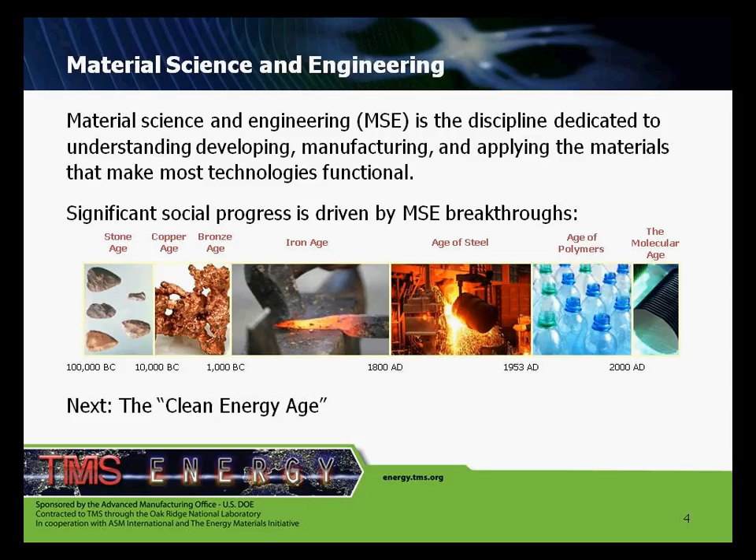If we look at the population growth and the rate at which it's growing at 1.4% average per year, and the increase in energy demands at 1.7% per year, it is very clear that the clean energy age is here, and we need to position ourselves as a competitive nation, to ensure that we can produce and manufacture and make available the materials for an age where renewable energy has to be a main player. As I said, it's really critical to our national priority.

There have been a lot of reports coming out in the recent past that are also pointing out the critical role of materials. But more than just materials development, it's the manufacturing and making of all of these various materials for the clean energy economy. TMS, the Minerals, Metals, and Materials Society, has led a 2-year study. This was not a committee of 6 or 7 people coming together, but a long-term effort with many people involved.

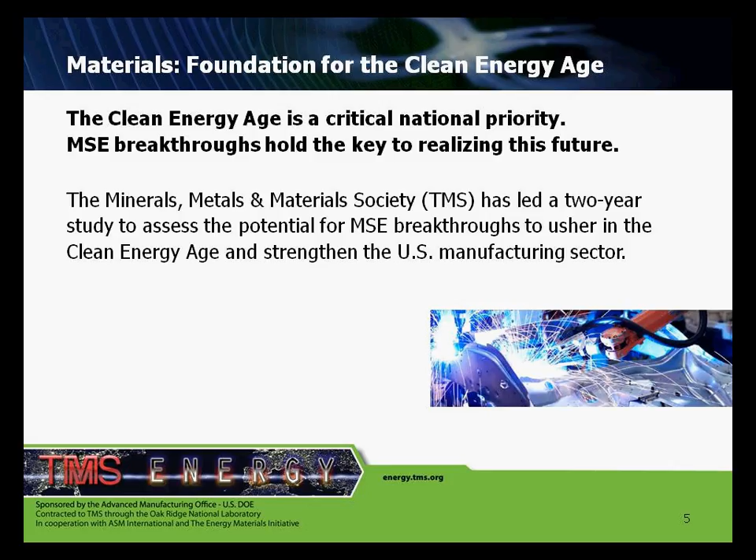To do what? To assess the potential of MSE breakthroughs. What are the main areas in which we can really make an impact in the short term as well as the longer term? Short term meaning the next 10 to 15 years, and longer term meaning 20 to 30 years or so. So TMS has really taken the lead to organize and facilitate and, as I said, led this study. And as I've already pointed out, it was not a small committee, but rather many people were involved.

Warren Hunt later on will talk about the process and the various phases, but in a nutshell, we had a blue ribbon panel that looked at setting the vision, the framework for what are the areas in which we must be focusing in this study to make an impact, to meet the objectives of the study.

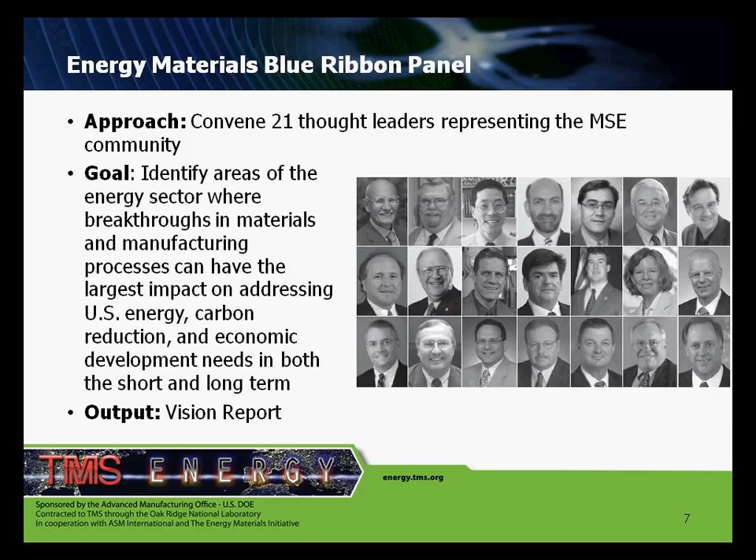The output of this is a vision report that if you have not read it, you really should. It's only about 20 pages or so long, very well written, very well done. A lot of work has gone into it and it really set the stage for all the various phases that followed suit. At this point, I'm going to give the floor over to Warren, who's going to talk more about the various phases and what came out of these studies. Warren?

Thank you, Diran. I'd like to first provide you with a little bit of an overview of the project, and then I'll discuss some of the specific findings in a bit more detail. The result of the work that Diran described was a series of reports that were published over the 2-year period of the study. The first of those that Diran referred to earlier was the vision report of the Energy Materials Blue Ribbon Panel. And this was work that identified the high-level areas of the U.S. energy sector where material science and engineering research in particular could make potentially significant contributions to our energy and carbon reduction needs.

At the conclusion of the vision report and the Blue Ribbon Panel activity, we convened a number of groups to work on the second phase of the project, in which opportunity areas in material science and engineering that would create significant economic impact, energy savings, and carbon emission reductions were identified. The results of that phase of the project were published in a report called the Opportunity Analysis for Material Science and Engineering. This report was published at the beginning of 2011.

In particular, today what we're going to be talking about is the third phase of the study. This third phase is captured in the Innovation Impact Report, which was just released at the end of 2011, results from the work of a number of experts, 50 or so in number, representing industry, academia, government laboratories, government agencies. They were organized into 5 innovation impact teams, and the purpose of that group's work was to really look at specific opportunities where manufacturing and materials innovation could deliver the opportunities in the relatively nearer term, in the 2 to 10-year period.

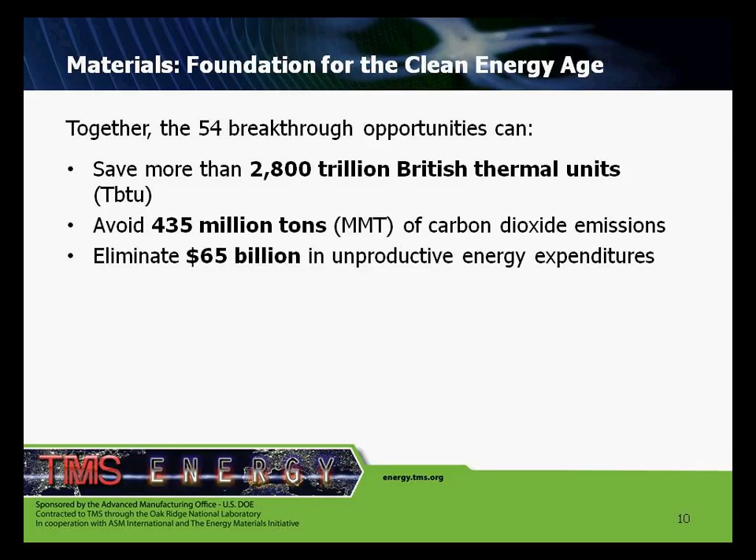Now, I've just provided the very highest level information from the report. In the report itself, there are some more specific breakdowns of energy savings, carbon reduction, and economic development opportunity by various areas of energy generation, energy storage, and energy use. So I would refer you to the report for that further information.

Now I'd like to talk through a few of the areas where breakthrough opportunities were identified in the project. And I would like to offer them to you in 4 major categories. I'll actually talk about the first 3, and then I'll hand off to Dr. George Spanos to talk about the 4th. And these 4 major areas are listed here. First of all, materials and manufacturing advancements can make manufacturing more energy efficient, more productive, and more profitable by reducing the losses that occur in terms of time, materials, and energy in those processes. So we'll talk a little bit about that.

Next, we want to talk a bit about reinventing energy-efficient transportation. And in this area, we talk not only about automotive transportation, but also the many other forms of transportation. And we'll be looking here not only to look at how we might reduce energy and environmental impact, but also jumpstart the development and growth of new supporting industries. The third area that I'll talk about is making the most of our energy resources, both through more efficient energy generation and by maximizing the value of our emerging energy resources. And then last will be discussed the acceleration of innovation, and in particular here the employing of cutting-edge computational tools and techniques that save time and money in bringing the next generation of energy materials and processing discoveries to market.

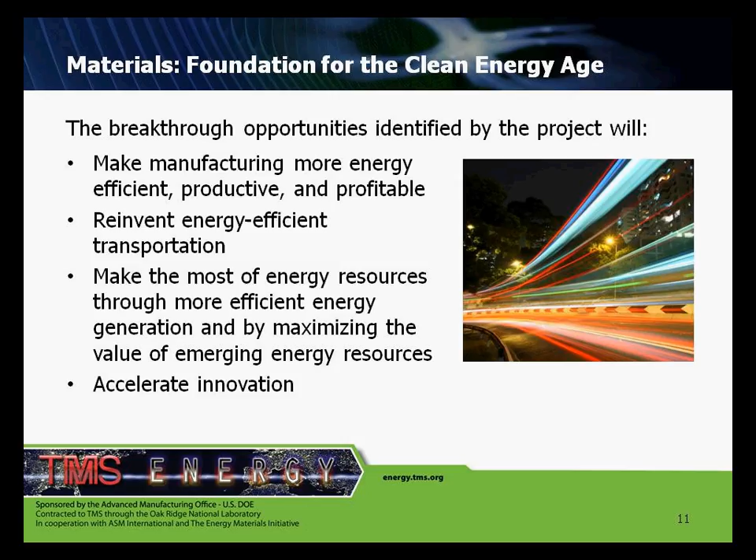So let me now say a few words about each of the first 3 areas. First, let me talk a little bit about making manufacturing more efficient, profitable, and productive. This is an area of great opportunity for the material science and engineering community. And in particular, materials and manufacturing advances allow us to minimize wasted material through things such as net-shape processing, combining and streamlining processing steps. And an example we'll talk about here in just a minute is perhaps an area like additive manufacturing. And then also, recycling and recovery of both materials and energy can help make manufacturing processes more efficient, productive, and profitable. So these are some of the broad areas. Again, the report in its various opportunities discusses some specific areas in more detail.

But let me just mention one particular example of how materials processing can be used to make manufacturing more efficient. And this is an example that is cited in the Materials Foundation for the Clean Energy Age booklet, and it is provided to us by Caterpillar. It's the Caterpillar remanufacturing process. Through a surface modification process that Caterpillar uses to apply wear and corrosion resistance coatings by processes such as metal spray and laser cladding, they were able to remanufacture 100 engines per day using only 10% of the energy that it would take to manufacture new engines. So significant savings in energy, reduction in carbon dioxide, and improvement in manufacturing efficiency.

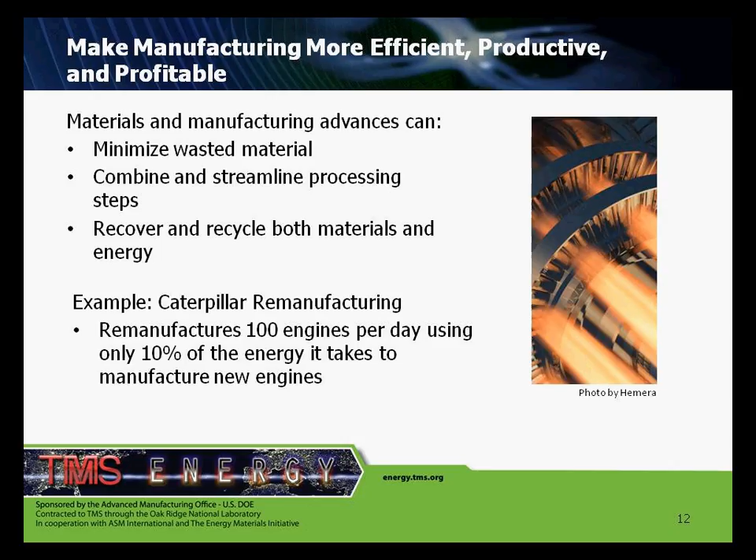Let me move on now to the next area that I'd like to focus on, and that's particularly looking at reinventing energy-efficient transportation. And this is an area that there's great opportunity, again, for material science and engineering to contribute. Materials and manufacturing advances can enable us to produce more cost-effective, lightweight, high-strength materials. Reducing the weight of our transportation vehicles is a significant way to reduce their energy consumption. Also, it can facilitate multi-material construction of these vehicles. Oftentimes, not just one material of construction is desired for the most efficient structure, but joining these materials together can oftentimes be a barrier.

So facilitating construction of vehicles made from many materials is important. And certainly improving battery performance and affordability in hybrid and electric vehicles is important as well. But again, in the way of illustrating something specific for you here, let me just highlight one particular case study that again is described in the Materials Foundation for the Clean Energy Age booklet.

And this is from the Ford Motor Company. They have actually been working on developing aluminum castings, aluminum engine castings that will significantly save weight. And they've been able to reduce the product and process development time very significantly and save a significant number of dollars in terms of R&D expense. So this is an area where now again the tools, computational tools and capabilities can really make a strong contribution. And we'll hear more about that in just a little bit.

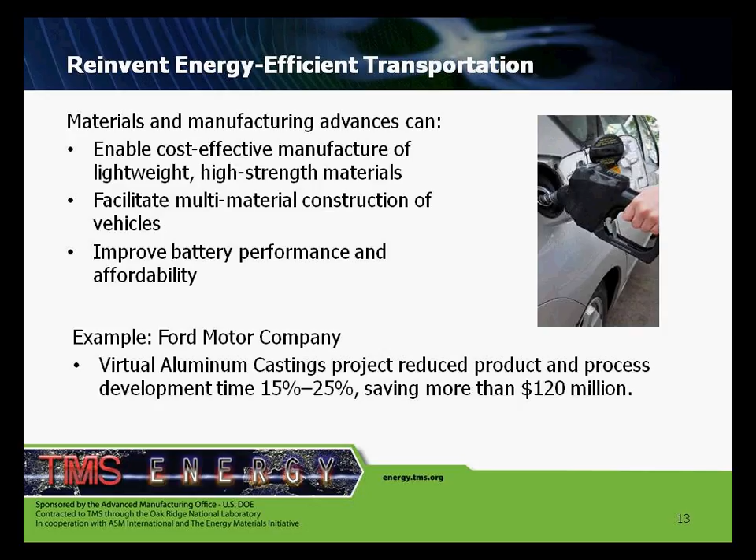The third area that I'd like to cover is making the most of our energy resources through more efficient energy generation and by maximizing the value of emerging energy resources within the spectrum of energy generation and storage technologies. A few of the kinds of opportunities that were identified in the report and are covered here are converting waste heat to electricity more efficiently, particularly through improved thermoelectric materials.

Second was improving the tolerance to extreme operating conditions of next generation energy systems, in particular operating those systems at higher temperatures. And that applies to both conventional power generation as well as the nuclear power generation area. And the third area that falls into this category is increasing the performance of renewable energy systems, such as battery systems. And that's an area where I'd just like to offer one additional example.

This is a company called A123. They're a battery manufacturer. Through material science improvements, particularly in the area of the lithium-ion cathode development, in which they have chemically doped this with a nanoscale phosphate to improve battery life, they were able to achieve a battery life improvement of nearly 10 times compared to conventional batteries. That's a significant benefit for the use of these batteries in a number of applications.

And again, from the economic development perspective, a point to make here is that this success has enabled the company A123 to grow from a 10-person startup team to over 2,400 employees in 10 years. So we can see that not only do these improvements impact our energy, carbon, and reduction areas, but also enhance economic development. So those are the three examples that I wanted to give you in this area.

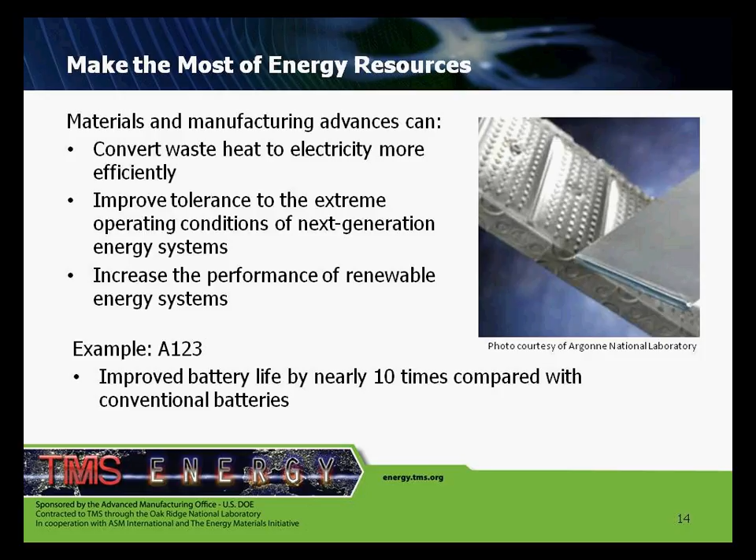Let me just make a comment on the next slide in terms of, well, where is this going forward? How can this all have a material impact? And I think the importance of material science and engineering and energy systems is being really broadly recognized now, much more so. Not only in the federal government, but also in university programs and in industry. But let me just highlight three areas where the federal government has been involved in really moving material science and engineering R&D forward.

First, the Department of Energy's Advanced Manufacturing Office, previously known as the Industrial Technologies Program, is focusing on two main areas of technology research and development, innovative manufacturing processes as well as innovative next-generation materials. So this is an area that they're directly supporting, and I think it clearly shows the role that MSE can play. Two relatively recent announcements: the Advanced Manufacturing Partnership.

This is the Obama administration's partnership, a national effort bringing together industry, universities, and the federal government to invest in emerging technologies that will create high-quality manufacturing jobs and enhance our global competitiveness. Advanced materials is a key part of this partnership, and in particular, I'd highlight the Materials Genome Initiative, which is being developed through the Advanced Manufacturing Partnership. It's slated as a $100 million multi-stakeholder initiative focusing on accelerating materials discovery and development. And clearly, energy materials have a key focus in this initiative.

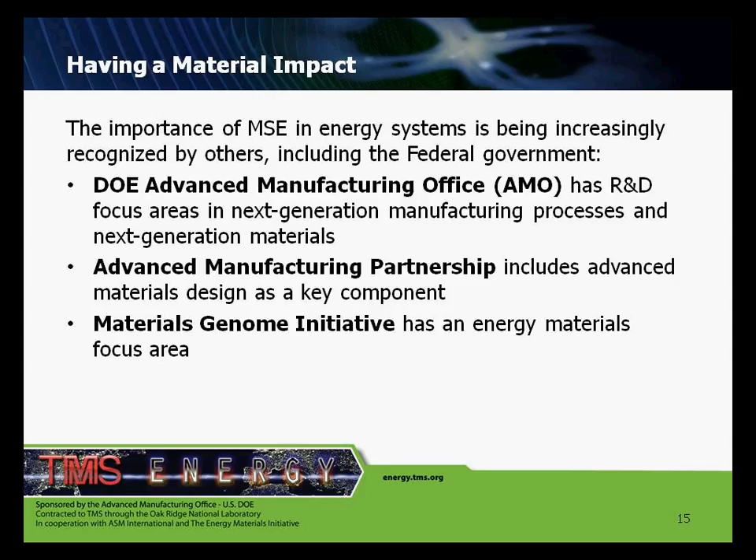The Innovation Impact Report will be a valued resource for informing these and other programs as we go forward, because it identifies some specific opportunities for MSE breakthroughs that are going to save energy, reduce emissions, and strengthen the economy. To realize these opportunities in the near term, however, accelerating the materials and manufacturing innovation process is critical. And so to address that, I'd like to hand it over to Dr. George Spanos, the Technical Director of TMS.

So the first question we can ask is, why is accelerating innovation so important? Well, material science and engineering development and deployment historically is often very slow and expensive, and that causes many applications to make do with the existing materials and technologies that are available. But using existing technologies prevents energy systems from achieving their optimal performance, and in particular, these long lag times inhibit the U.S. from being the first to capitalize on the innovation opportunities.

We have cutting-edge computational tools and techniques that can provide options for accelerating this innovation. In particular, these tools are critical to understanding the nature of materials and simulating their system performance, and also for predicting and preventing materials failures. I'd now like to cover two of the tools the material science and engineering community is using to successfully accelerate innovation.

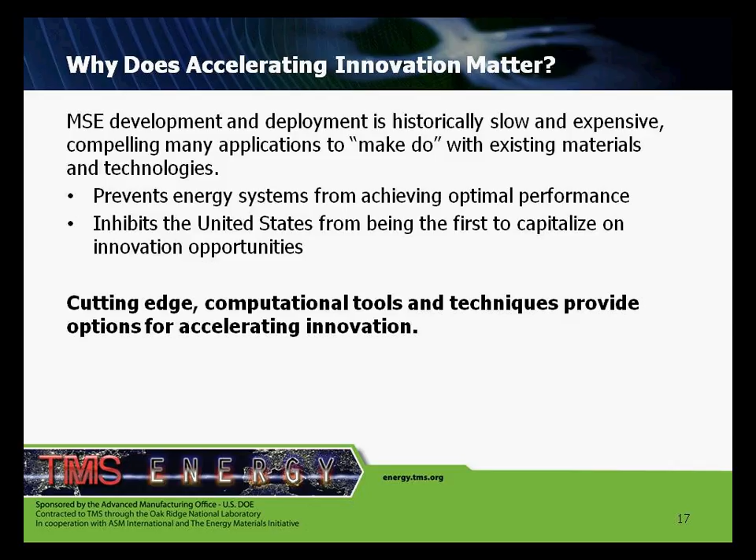The first thing I'd like to discuss is collaborative materials databases. What do they contain? They contain images, sometimes videos, and especially quantitative data that characterize the structure and the properties of materials. For example, the internal structure of a material, its strength, its corrosion resistance. These databases help scientists to make informed decisions when they're selecting materials for a given application. They also streamline the design, reducing trial and error and resulting in large cost and time savings and energy savings.

Just as importantly, they provide critical communication with the computational models for both the model input, oftentimes that's experimental input that drives the models forward and validates them, and output so that people can see the output and use the output of the predictive models.

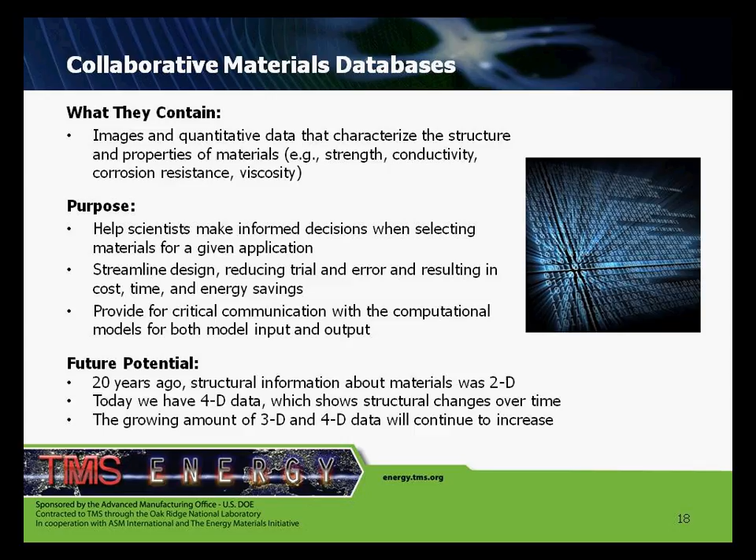There's a great future potential here for this technology. 20 years ago, for instance, structural information about materials was predominantly two-dimensional in nature. But today we have four-dimensional data. And what we mean by that is data that's spatially in 3 dimensions, but also changes over time, and time is that 4th dimension. The growing amount of the 3D and 4D data will continue to increase, enabling the acceleration of material science and engineering advances as we go forward.

Another enabling tool for accelerating materials and manufacturing innovations is something called integrated computational materials engineering. This integrates materials information that is captured in computational tools with engineering product performance analysis and manufacturing process simulations, as brought out by the 2008 National Academies study on ICME. So the purpose is to simulate the complete materials and component development process from the basic materials issues to simulating manufacturing processes. In this way, it's very useful to reduce the number of physical test models needed, and this can result in large cost, time, and energy savings.

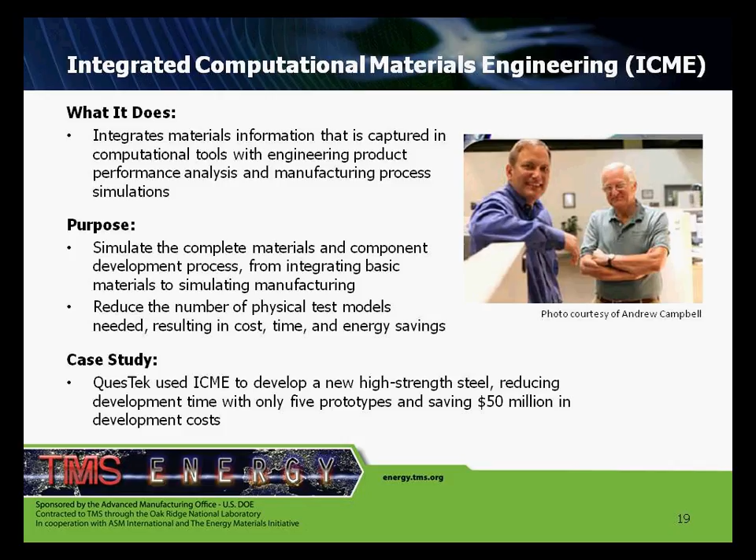In this regard, one case study that I'd like to mention is a study by QuesTek Incorporated, which is a materials development firm. They used integrated computational materials engineering to develop new high-strength steels, reducing the development time with only 5 prototypes being needed, saving an estimated $50 million in the development costs. This ultra-high strength steel offers superior corrosion resistance and is ideal for meeting the demanding performance requirements of landing gear in aircraft.

Implementing acceleration tools is key, and there are 2 initiatives that are helping to facilitate this implementation. One is the Materials Genome Initiative, and the other is Materials Innovation at TMS. Warren Hunt described a bit earlier the Materials Genome Initiative for Global Competitiveness, and it's a national initiative that supports the development of computational tools, software, new methods for material characterization, and the development of open databases. This initiative is clear recognition by the administration that tools like integrated computational materials engineering and collaborative materials databases are critical to making the process of advanced materials discovery and development faster and less expensive.

As visible in the graphic on the upper right-hand side of the screen, in addition to clean energy, this initiative has the ability to impact national security, human welfare, and the next generation workforce. It recognizes the importance, especially of advanced material systems, to solving pressing national energy challenges and effectively promoting a renaissance of American manufacturing. The other initiative I'd like to mention is a TMS initiative known as Materials Innovation at TMS.

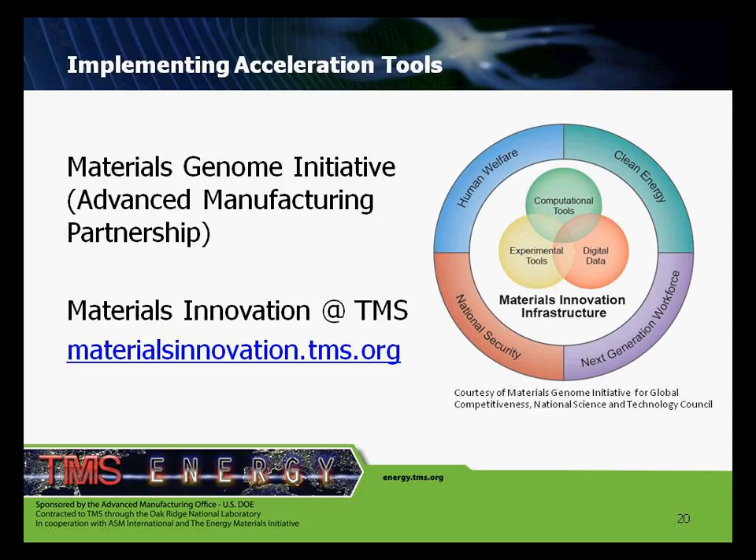Thank you, George. The materials and manufacturing opportunities we've discussed today form the foundation of a new era of environmental sustainability and economic growth in the United States, fueled by significant cost, production, and energy efficiencies, and global leadership in the manufacture of products and technologies responsible for these efficiencies.

Capturing these opportunities requires a systems approach and a cooperative effort. And specifically, we think it needs the following items. First, an integrated approach that engages all facets of the materials and manufacturing spectrum across the academic, industry, and government sectors, and across industry large and small. It also needs rational, sustained federal support for materials-based research and development.

We also need to have workforce development in materials science and engineering, not only at the university level and creating the future workforce, but also in the roles of professional society and industry to train the current workforce. In addition, greater industry access to the knowledge, expertise, and cutting-edge resources available through academia and U.S. national laboratories would be a great enabler. There's increased progress in this area.

So in summary, materials science and engineering clearly has the potential to make great impacts in the U.S. energy, carbon reduction, and economic development needs. And the opportunities are pervasive across many industries and sectors and achievable in the nearer term. In conclusion, materials are indeed the foundation of the clean energy age.